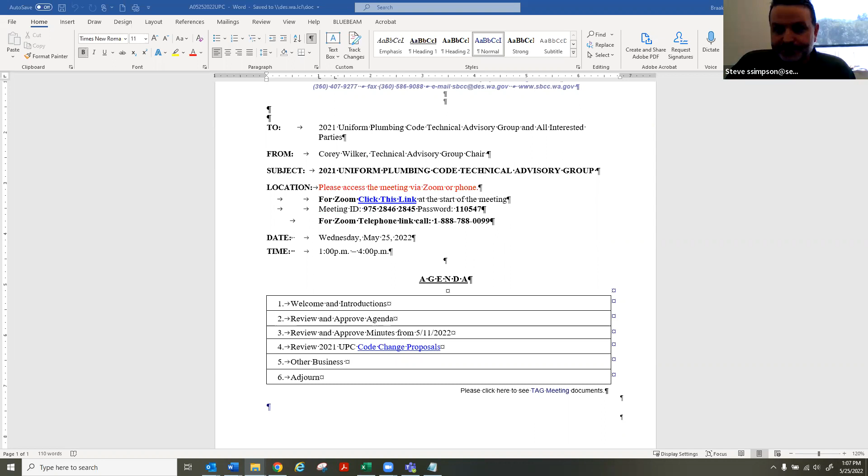Let's move on to item number 3 on the agenda, which is review and approve the minutes from 5/11. And we don't have the minutes because on 5/11, we didn't really have a meeting. We closed the meeting, yes? We didn't have quorum, and we closed the meeting, yes. So you have to help me procedurally. How do we move past this agenda item? We just pass the agenda item and get to the next one. Well, shouldn't you approve the minutes from January since that was not done at the last meeting? Krista, do you have these minutes handy? Should be popping up. Okay, thank you.

Mr. Chair, if it suits you, I'd like to make a motion to approve the January meeting minutes that are on our screen currently. Thank you. Krista, can you move that down? Is it January 5th? January 5th. We have a motion. Can I have a second, please? Second. Thank you. We have a motion and second to approve the minutes from January 5th. All those in favor say aye. Aye. Any opposed? And we will correct Jed's name. Oh, yes, Sherman is not spelled correctly. I accept that as a friendly amendment.

Okay, so we will move on to agenda item 4, which is review the 2021 UPC code change proposals. I have the list in front of me that I printed out, and just in discussion, does anybody have an issue if we just follow straight down this list, starting with section 608.5 and working down? Is that all good with everybody? So starting with the proponent, the City of Bellevue. 608.5 discharge piping. I'd like to open that up for discussion.

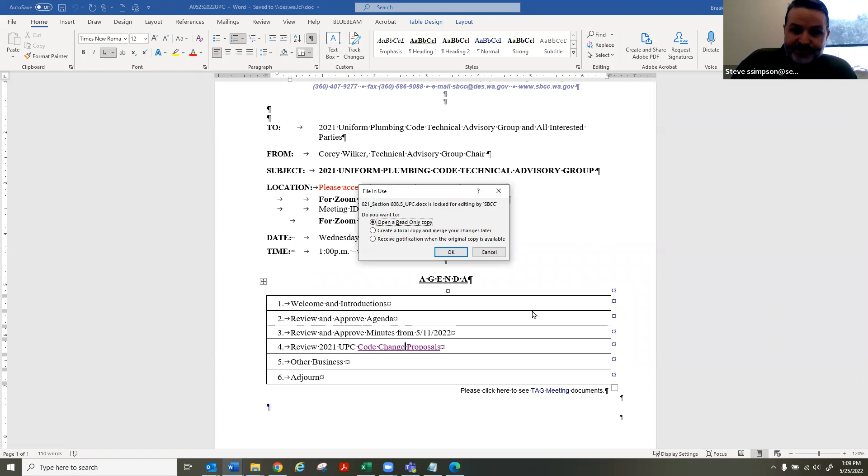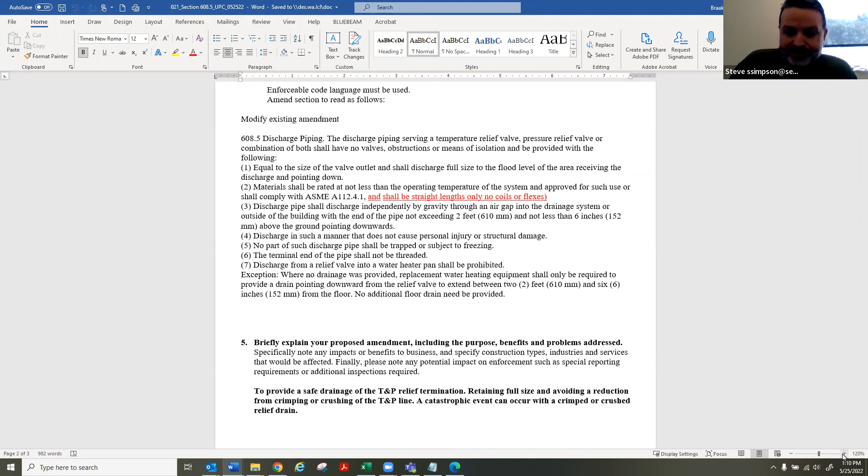Mr. Chair, I can speak to this one a little bit. I was on the council when this particular code got revised, and we didn't catch a piece of it at that time, and it's been unamended since. I think Chris is getting ready to pull the information up. The issue is that the code used to require rigid piping for the discharge piping of a temperature pressure relief valve of a hot water system. And somehow when they went to the new material section in ASME, it got rid of that component.

And so the concern, and it's an extremely valid concern of the plumbing officials over in Bellevue, is that you would potentially have a kink situation with a flex hose, plus you have a reduction of flow with flexes. So there's no way to write up a correction for someone just hooking up basically a flex hose as opposed to straight piping, which is what it used to be.

So I would speak to support this code change for the life, health, and safety benefits that it would give. Thank you, Chair. Thank you. Are there any other comments on this particular issue? Yeah, proposal? Steve Hart. Rather than saying with no, I think it might be more appropriate to say without coils or flexes. And shall be straight lengths only without coils or flexes. Change the word no to without.

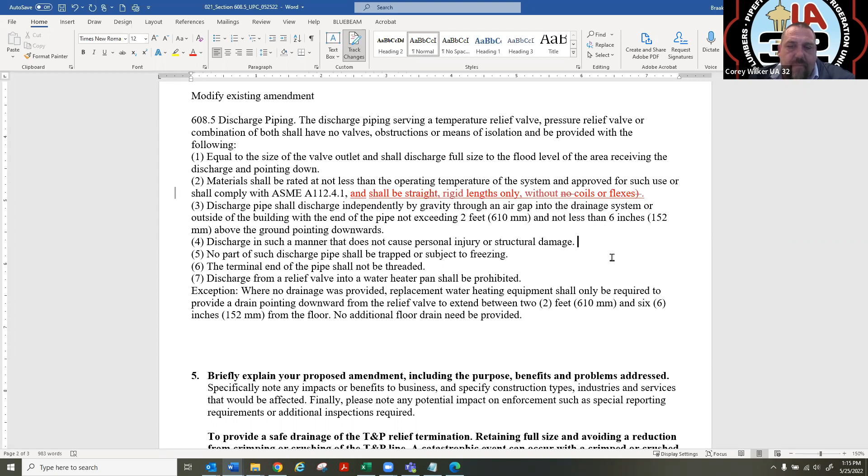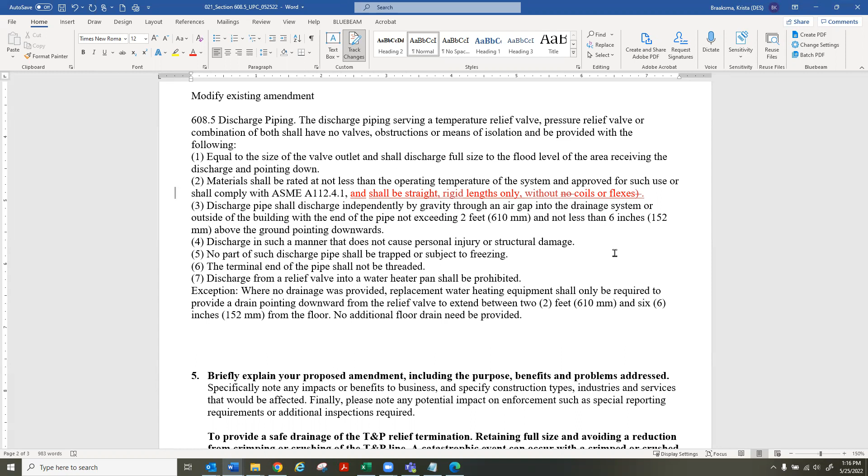So we all understand that it applies to pipe, but I'm just trying to read the whole thing at once and see if there's a better way to verbalize it. Do we need to add the word piping? No, I don't think so. It's pretty straightforward, because the section is discharge piping. Okay, Mr. Chair, I'd like to move that we approve this. We have a motion for approval. Do I have a second? Second. Should we do a roll call on these proposals, or is it okay to do aye and nay? It's okay to do aye and nay. All right, we have a motion and a second to approve the first proposal for section 608.5. All those in favor say aye. Aye. Any opposed? We'll move this proposal forward as adjusted.

The next proposal on the list is Appendix M UPC for the peak water demand calculator. I'll open it up to the floor for discussion. I actually have a question in general about all the appendices, because there's a lot of them that are not adopted. I'm just curious of the history of why they're not just adopted up front. Ken Burlett's got his hand up. Go ahead, Ken. Yeah, my comment is, part of submitting your code change proposal is to include the text. It's right there on the document itself. And it wasn't included in any of his code change proposals. It just says we want to adopt these appendix sections, but the words just aren't there. So I'm hoping that you guys will maybe reject these since they weren't submitted properly.

It's a good point. So we overlooked that. I assume the proposal is to adopt the model code appendix M, N, and F. Is that correct? Yeah, I think for these next three proposals, are they all missing the appropriate language? Well, they'd have to include the whole appendix in there, what you just referenced. So I just want to adopt this appendix. And you'd have to just basically recopy the appendix in there where it asks for the amended section to read as follows.

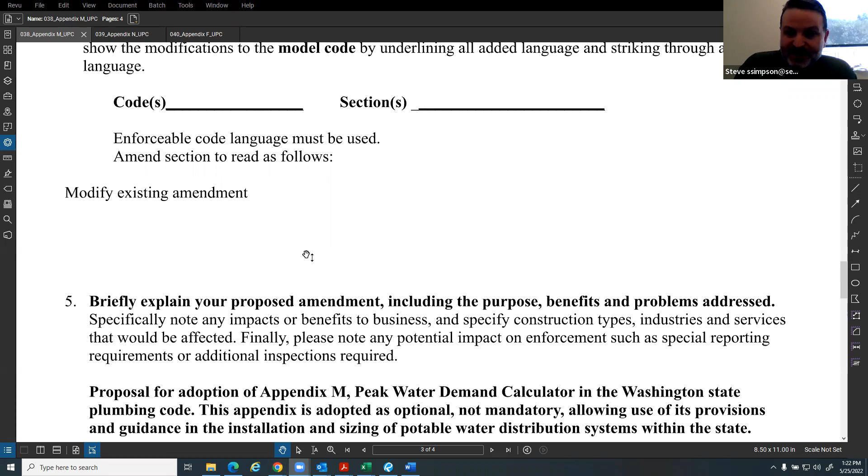If you wanted it mandatory, you would get rid of the optional piece and just say if you're in residential construction for multifamily or single family, you have to use Appendix M. That would be the mandatory language, I think. And I could be wrong. In looking at Appendix M, the applicability says it provides a method for estimating demand. It's more like, okay, here's another option to determine the peak water demand. It's not necessarily, this is the way you have to do it. It's kind of the way I read it.

Right. And Eric, I think what it does is it gives you an engineering method to get to smaller pipe size, increase the velocity, and those kinds of things. So it does a few things, probably an energy beneficial component, saving hot water. Instead of running 1/2 inch, you'd run 3/8 potentially in some applications. Right, this is similar to what we do with adoption of Appendix A. Yeah.

And this is Steve Hart. I believe that the language is ambiguous because people already have the option, if they choose to adopt their own code like Seattle has, they can impact it by adopting whatever appendices they wish to pull into their own code, which is specific to their jurisdiction.

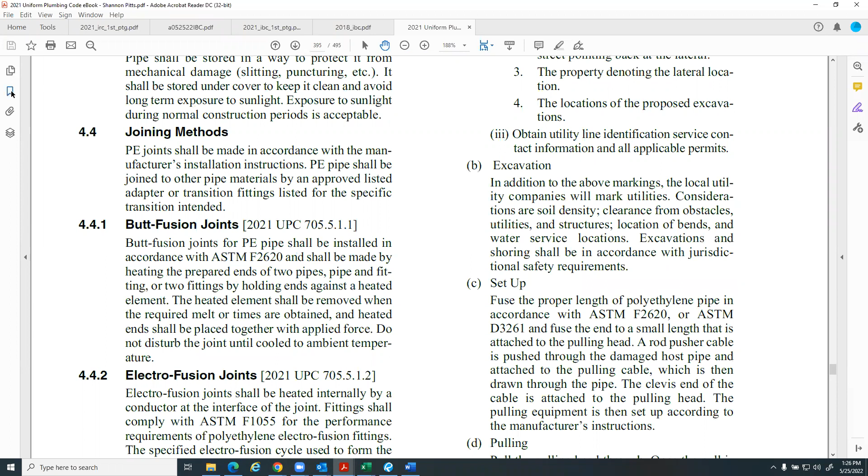That might not be so connected because Appendix C allows the same probability of use, and the parameters of system sizing are very closely connected. That being said, using a demand calculator versus Appendix C, and I don't believe unless somebody has a homegrown spreadsheet where they can input data and spit out system sizing, etc., it's pretty much very closely related.

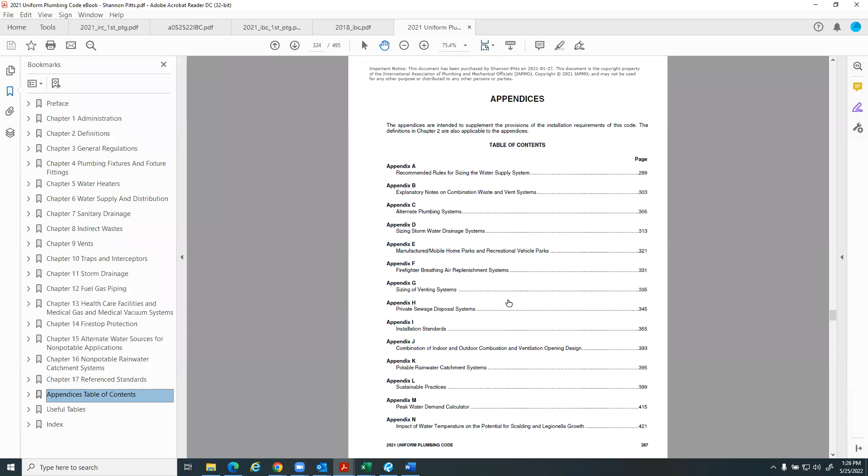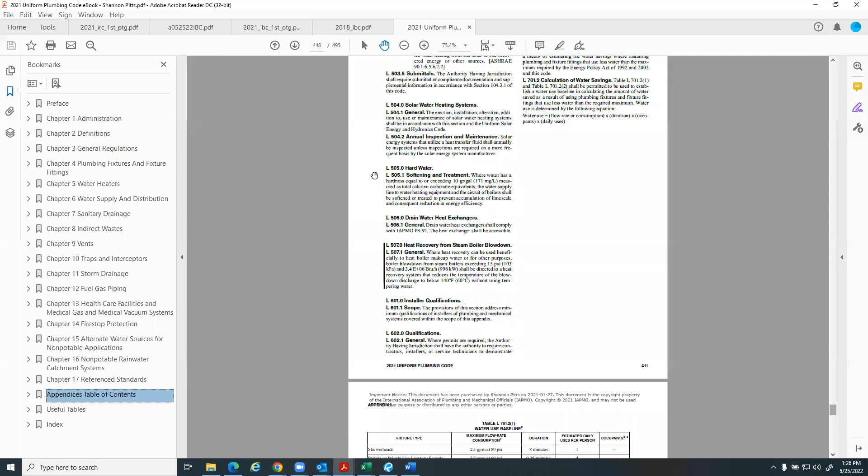The only difference between the two is Appendix C can be used appropriately as wanted for the occupancy, as Appendix M is very specific what it can be used for. So you're only talking about certain occupancies or structures, meaning multifamily, hotel, motel. And so when you use Appendix C, you have those same probabilities of use.

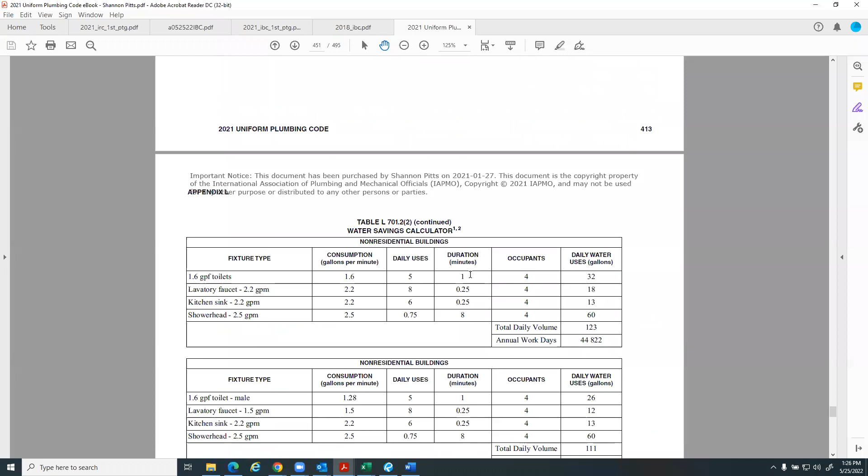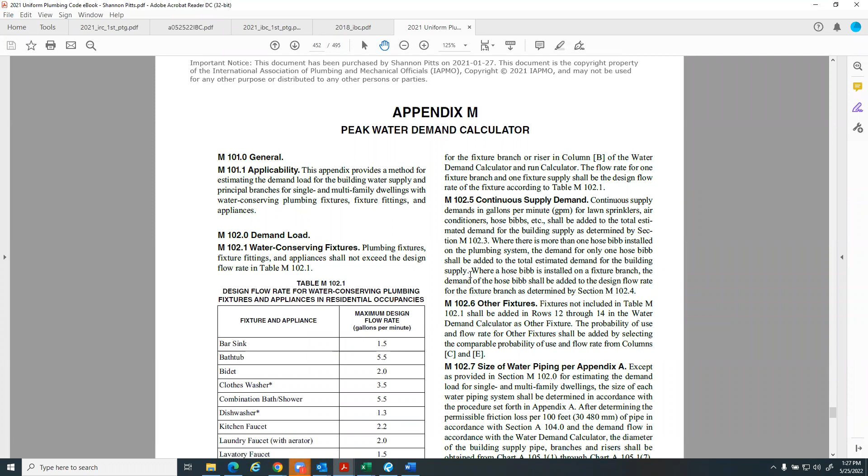And I'm not really sure where the savings is occurring because the sizing is very similar. The only difference is where and when it can be used. So C would apply to all buildings, but M applies specifically to single family and multifamily. In this language, yes, meaning these are multifamily and they do say for single and multifamily dwellings.

But if you run this calculator, you don't really make a savings. And so I'm not really sure why they even incorporate single family, because it really doesn't come into play. It's usually used, as I stated, for multifamily dwellings that are multi-story structures, hundreds of units, not a singular single family home.

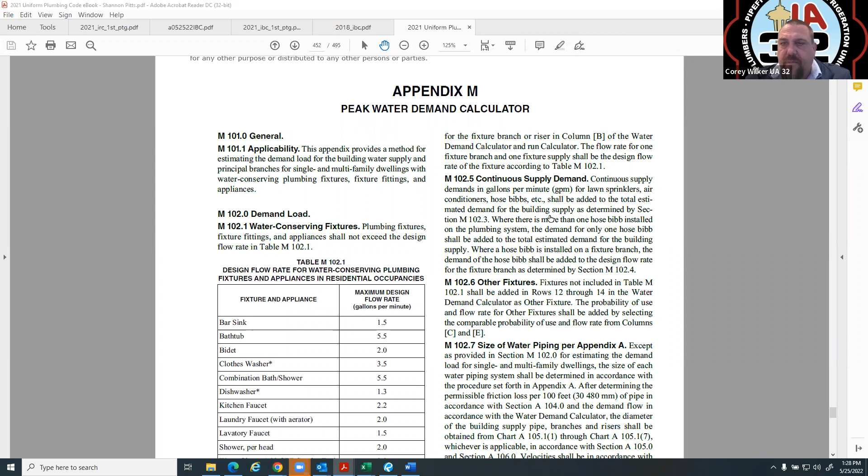So Steve, can you help clarify then? You said you were opposed to moving this forward; what specifically is the deterrent for you? Well, the issue that I have with it is that Appendix M is a system sizing calculator that the layman can use, but because they use it, they may not be able to discern where correction or error is occurring because it's on a higher level.

Whereas Appendix C gives you the same demand, and in our jurisdiction in the city of Seattle, we require that it be used and incorporated for design by a design professional, somebody in the discipline of understanding really what the accommodations of Appendix M derive as far as system sizing goes. And it's from an engineering perspective and not prescriptive.

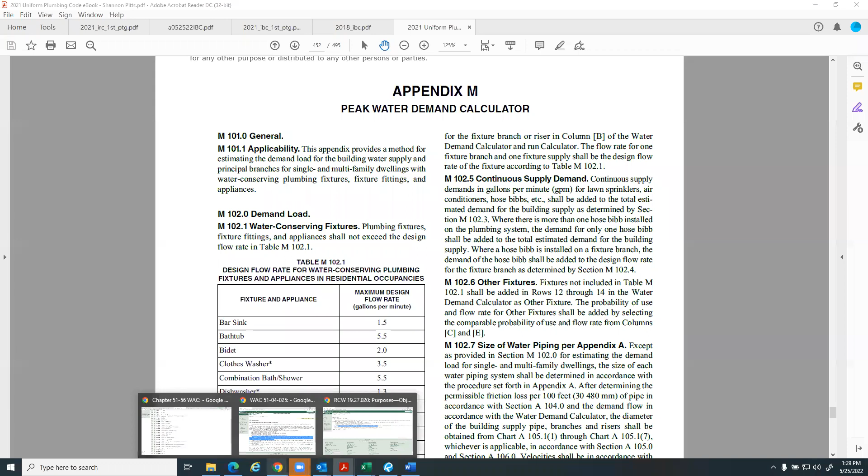It may spit out numbers that are in layman dialogue for velocities and size and even GPMs and fixture units and so on for runouts and branch mains. But if there is an error in any of the documentation, the person that is using that demand calculator, not being a design professional, would not know the error of that design. They may, but I doubt it.

And this is the conversation that I have had with other individuals regarding this. Appendix M is really a type of system that, like in our jurisdiction, the city of Seattle, requires somebody who has a higher level of understanding and knowledge of the components and how you arrived at the loading and the sizing of these systems.

And you can do the same thing with Appendix C using individual numbers, but in a more calculated way that's more robust, that really requires the knowledge and the experience and the discipline of engineering. Whereas you're given a calculated sheet in Appendix M and all that information is spit out towards you based on what you're applying into it.

And for that, I don't think that the community is ready yet until enough Appendix M systems have been installed so that those who can see them will understand how they're being used. In fact, I believe maybe 4 years ago, Appendix M being applied in a project in Seattle was the first in the nation. So you can see how in the infancy of this design calculator, how far away we are from really getting true measurable empirical data when these systems are installed. I think the industry could probably handle it, but the average designer is just not ready for it yet.

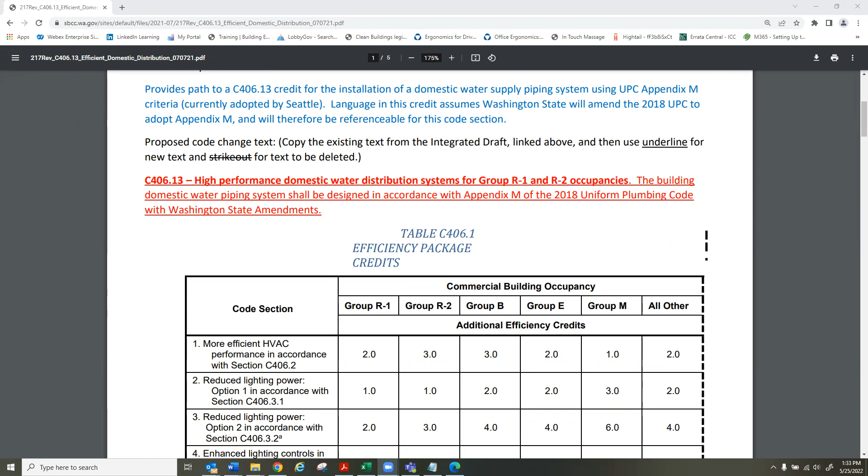Yeah, the loading. When you look at certain levels of sizing based on parameters of minimum and maximum loading, either by GPM or velocity of the material being proposed, what you discover is that the amount of allowance you can use on a single piece of pipe based on pressure and velocity or gallons per minute at the fixture has a margin within there. Maybe in a very large home you might attach a couple extra fixtures on a loaded piece of pipe, whether it be a run-out from a branch main, or the branch main itself may increase slightly, maybe one pipe size or not at all, which is very closely related to a prescriptive environment, because the parameters for how much you can load into a piece of pipe are present.

Meaning you might get 7 water supply fixture units on a 1/2-inch pipe based on a prescriptive approach. But although you may input data into Appendix M that is similar, you may still end up with a 1/2-inch pipe. It may not change the size of the pipe system at all. It does change it when you get into larger uses and more uses and combined uses like in a multi-story, multi-family structure.

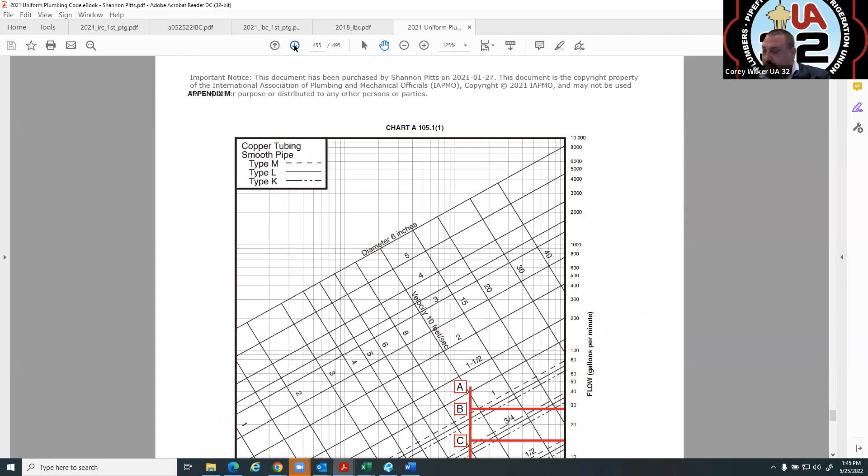Let's move on to the next proposal, which was UPC Appendix N. Impact of water temperature on the potential for scalding and Legionella growth. I'd like to open it up for discussion with the group. Does anybody have any information on this proposal? Go ahead, John. Yeah, sorry, I just had a kind of question. It's sort of related to what you guys just did on Appendix M as well. It seems to me that if it's not mandatory, there's no need to adopt it. If it's optional, it's optional. People can use it or not.

Yes, John, thank you. That was on my mouth. I just didn't say it, but if it's allowed by a local jurisdiction for adoption, and if the intent of the proponent was to make the council adopt this as optional, well, optional for who? For the local jurisdiction or for the designer, for example? So these are different things. What I see in the rationale for adoption, it doesn't say, oh, yes, as optional, not mandatory. So if it's optional... That's what AMMs are for, right? Alternate means and methods. Yes, but optional for who? Again, there is a difference if it's optional for the jurisdiction to adopt or optional for a designer to use.

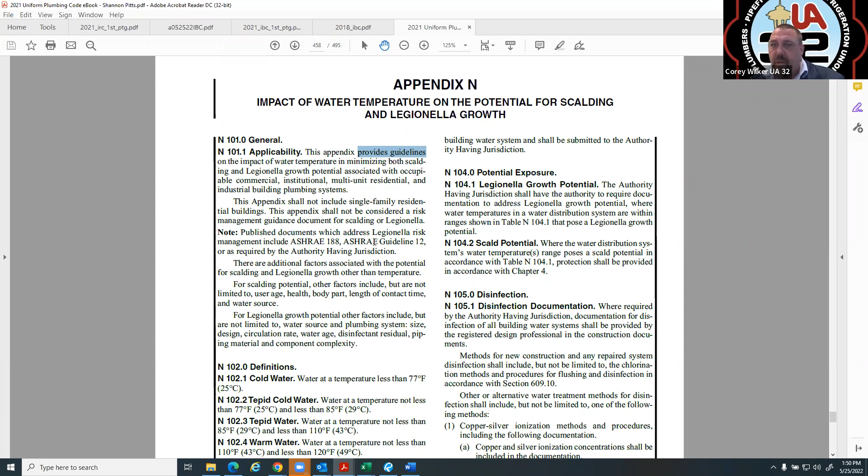And I don't know that, I just know it's important that we consider it. And part of it is if you can make pipe sizes smaller, you can increase the velocity, which will help clear the biofilm. And these other things in Appendix N are just helpful to kill it and keep it out of the water system before it goes airborne. And anyway, I just really wish the proponent was here to help us with the information.

Mr. Wilker, this is Ray Shipman. I just want to let you know that I was able to call in from a phone. Okay, Ray, thank you. Yep, thank you.

Hi all, this is Steve Hart. I just got off the phone with Ed Holmes, who informed me that the concept behind the verbiage in his statements for N, M, and F are specific to the adoption of a jurisdiction. So that takes away the ambiguity of how we're reading how it's being proposed. The context of the proposal is that a jurisdiction, like in your example of the city of Lacey, has the option to adopt, but it's not mandatory. Which they have anyway. Okay. That going back to John's statement.

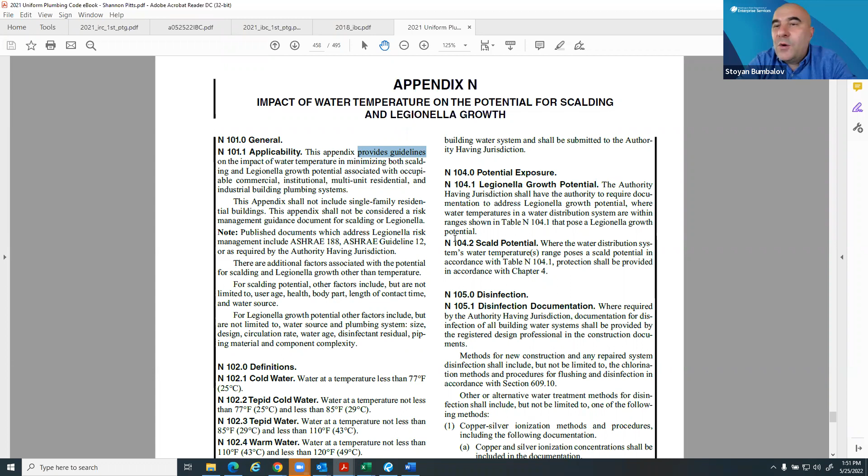But Stoyan, you had up that section where it says we adopt the appendices A, I, and I can't remember the other one, to be quite honest with you. I should know it after 9 years on the plumbing TAG. A, B, and I. Yeah, A, B, and I. So what that would do though, if we did adopt these, it would add A, B, I, M, you know what I mean? Then you would have something right in the WAC that says that those appendices are adopted.

Well, yes, but my question for you folks is, I'll use my wild card. I'm new here, so I'm not sure how you enforce that. But A, B, and I, in my opinion, if it's adopted, then it means that it's not a choice for the jurisdiction anymore. It's already adopted.

That's true, but the applicability of A, B, and I is that I do not need your permission to incorporate A, B, and I in any design that I choose. I can incorporate that in an engineered system, or into a prescriptive approach of a system design. The concept behind what is being proposed right now of M, N, and F is to incorporate that into the option of the jurisdiction. A jurisdiction already has that option. So the way that it's being proposed in the document by Mr. Holmes is really already allowed as an option.

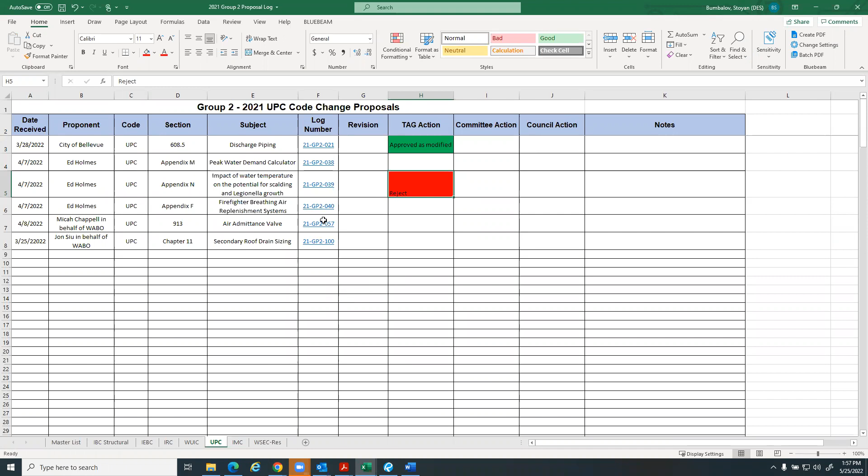Yeah, this is Steve Hart. I follow the same instructions I mentioned a moment ago, that I would not approve for the same reason that this is maybe a code cycle or two within the appendices. And there should be some sort of regulation on this, but I'm just not really sure who and where or how.

I'm really defaulting at this time to look at it more in the format of that being under the fire department, in their purview of how they view this requirement. And so at this time, again, I would not adopt this appendix at this time. Thank you, Steve. I think Mr. Ken Burlett can shed some light. Go ahead, Ken. Yeah, thanks, Corey.

So just to be upfront, City of Seattle Fire Department does not support this appendix. I was part of the fire code TAG. We did not support the appendix in the fire code for firefighter breathing air replenishment systems. And this proposal is a little bit different because it doesn't say optional in here. And if this was adopted and enforced, it has specific requirements for high-rise buildings over, I think, 200,000 square feet.

So it wouldn't just be a Seattle issue. It would definitely be a statewide issue for larger warehouse buildings. I do understand that there needs to be some regulation for these when they do get installed, but this section, if it got adopted, requires it. So it's not just a reference standard telling somebody how to do something. It actually says you must do it if you meet these certain criteria. So City of Seattle Fire Department is against this.

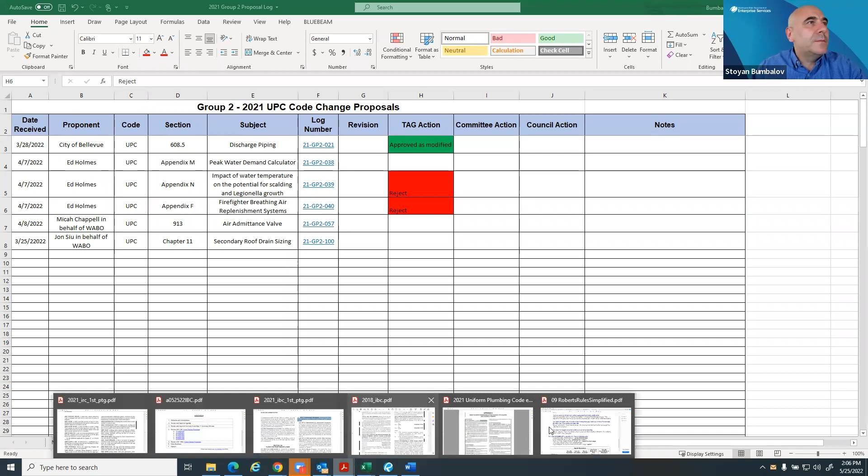I was unaware of a procedure that would allow that since we'd already voted on it. So how does that procedure come into place if we've already voted and approved? Let me show. Give me a sec. I think we're right here. So what I need is a motion to reconsider from someone who voted in favor of it. Yes. Thank you, Krista. Do I have a motion to reconsider from anybody who voted to approve Appendix M? No motion. Then we are not going to reconsider. Okay. So we are going to 057.

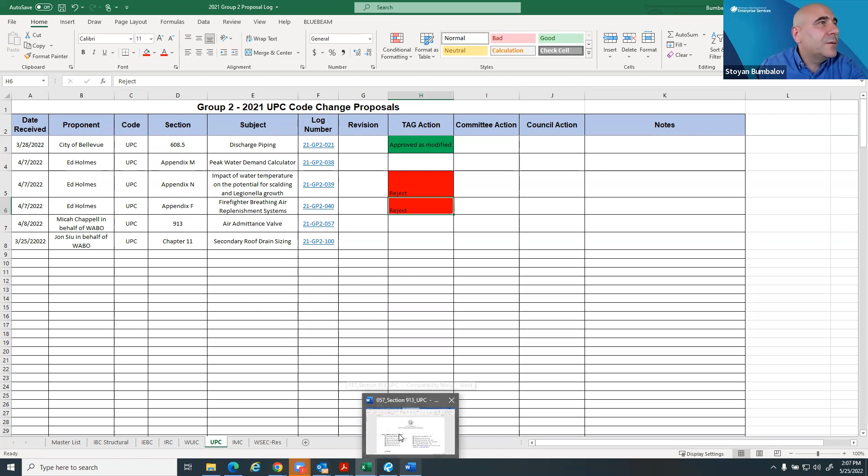Section 913, air admittance valve. Open up to the floor for discussion. Go ahead, Micah. Thanks, everyone. Micah Chappell. I am the Washington Association of Building Officials Technical Code Development Chair. We put forth this proposal because code officials get this request so often as an alternate method. Upon further discussion, we decided to put this in the Seattle code last code cycle with support of, hopefully, someone on the tag today.

It's been useful getting the feedback from the code officials. I don't think there's ever been a code official that has denied this. If there is, it's pretty rare when it does come across as an alternate method.

So the thought was, why not put it into the code for the state as just a straight allowance without having to go through that alternate method material request every single time. We did look at the IPC language and brought over some of that in similar language, but not exact. Some of it's exact, some of it's similar. But we did what we thought was a better reorganization of that information and then added a few things to it. We specifically wanted to talk about where these are permitted, the installation, and of course the location, which gets to be very specific and covers, you know, a lot of areas really that it's

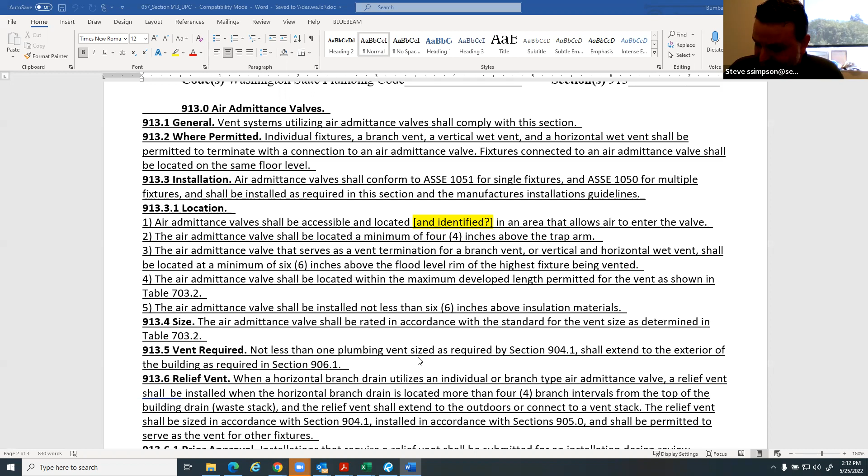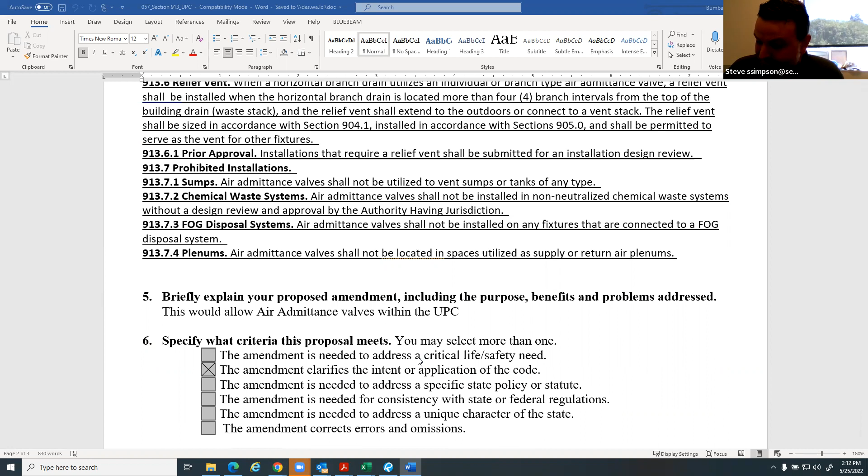Yeah, Mr. Chair. So I got a procedural question again. I guess that's probably because I was on the council for 9 years. So under WAC 51-04-025, I don't see anywhere in the amendment where the amendment is needed to address a critical life safety need, the amendment clarifies the intent or application of the code, the amendment is necessary for consistency with state or federal laws or regulations, the amendment corrects errors or omissions, or the amendment eliminates obsolete, conflicting, or duplicating unnecessary regulation.

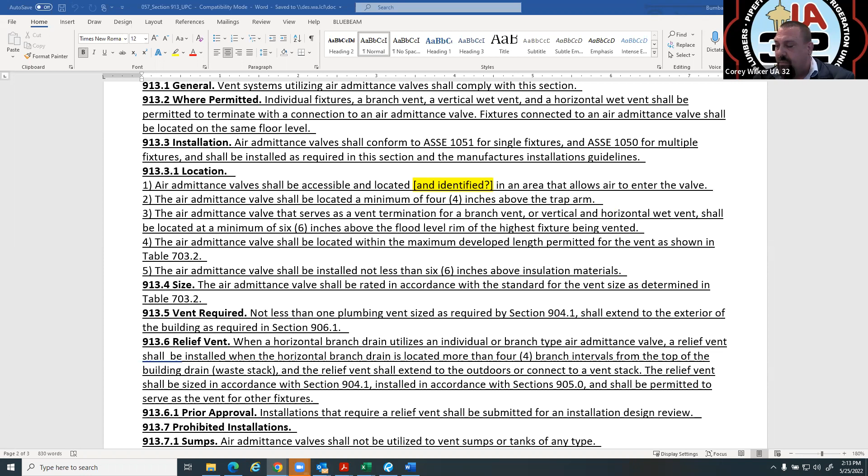And I don't see how this thing got to us if you use those parameters for how we get to the amendment. Once again, that's A through E for WAC 51-04, statewide and emergency statewide amendments to any of the codes. So I'm just kind of curious how we got there. So your point being that there's no criteria that is met to change the code? Yeah, once again, he has it checked off that it clarifies the intent or application of the code, but that would mean it was already in the code, and it's not. He's trying to add content, not clarify, in my opinion.

Stoyan or Krista, can you help with that? Well, again, personal opinion, if you're adding something, it's not necessarily that you're not clarifying the code. I haven't evaluated this proposal in detail, but you can submit a proposal to clarify something that's already in the code. It doesn't necessarily mean that you have to modify the language. You can add to it to clarify it. Again, this is how I read it. You may disagree with me.

Okay, so let's continue. Steve, do you have something to rebut or add? No, I'll wait for further discussion. I just needed to find out that piece of it. I'll wait for Micah to hopefully pick up from where he left off. Yeah, let's go ahead and jump to Micah again and let him finish, and then I'll come back for Larry and Bill Masaki. Go ahead.

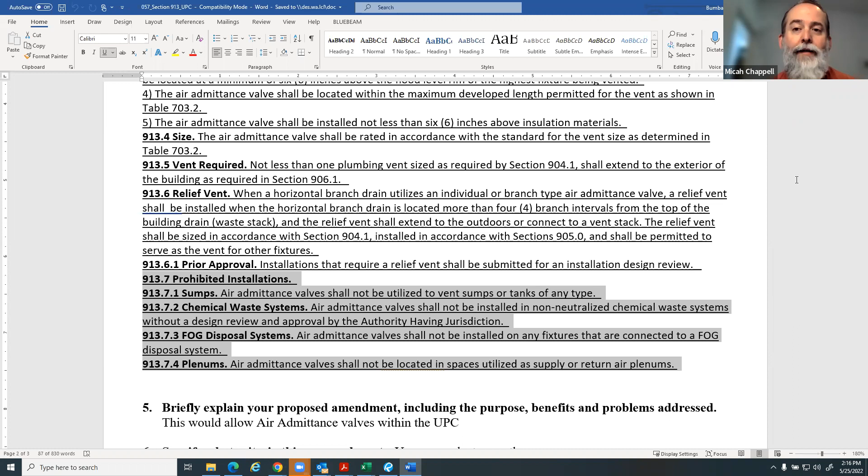And if you're doing that over and over and over, at some point you got to go, hey, this has been a standard item that is used. We should have this in the code or it should be allowed in the state code. That happens quite a bit. I mean, if we say we can't add code because it doesn't clarify or some other reason, then it really puts a limit on how we can change the code, especially based on items that are being installed on a regular basis. So I missed some of the other conversation, but I'll cede the floor to everybody else and more discussion.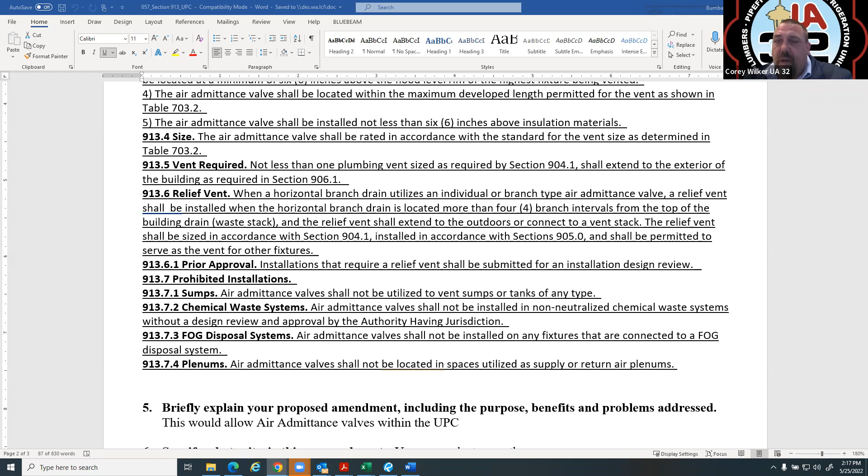Thanks. Thank you, Micah. And we'll go back to Steve. If you had something to finish, you still have your hand up. I'll take my hand down for a minute. I just forgot. Okay. Larry, are you still wanting to say something? Yeah. Go ahead.

Thanks. Thank you, Larry. Bill, you still have discussion? Yes, I do. To the proponent, Micah, on the criteria you selected, it clarifies the intent or application of the code. The unamended version is a venting system that uses no moving parts whatsoever. And your proposal here is to add a mechanical device to a venting system. So how can you explain to me how that clarifies intent or application? Because from my read, you're going in a completely different direction.

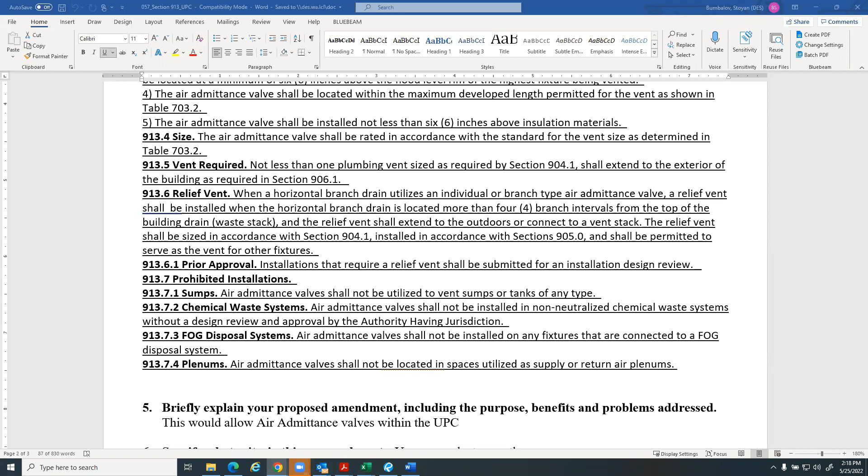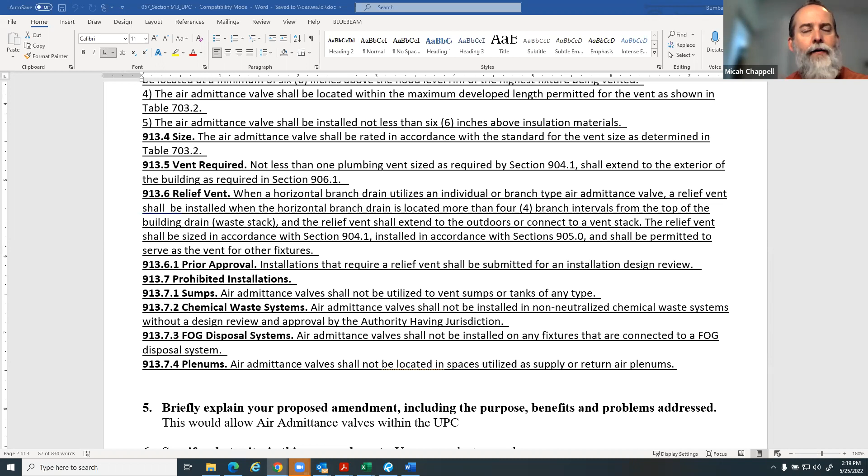Okay, I'm not sure I understand your question. You're asking how this clarifies the intent of a mechanical device being allowed. This would clarify the intent of the code to provide guidance on construction and installation. Maybe somebody else could provide input on that. The indication is that no one on this call has ever requested this as an alternate method, and that the only things that should be allowed are those passed through the code rulemaking process through another entity. That would indicate there's no way we can change something to provide guidance on when these are allowed as an alternate method.

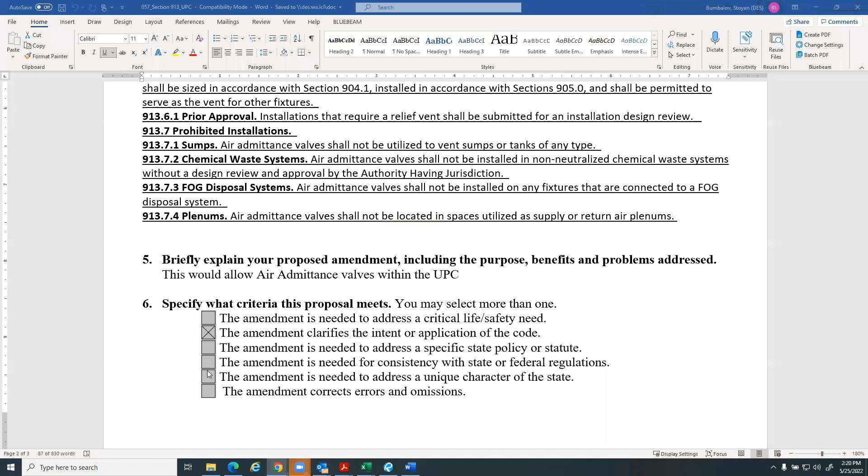I guess I'm missing something. No, I see it as a proposal for an alternate method, but not clarifying what's already in the code. The code doesn't use a mechanical system for venting. This does, so it's completely different than what's prescribed right now. And I'm curious how that meets intent or application.

Okay, so what I'm hearing is folks are not having an issue with the code change. They're having an issue with the criteria on where it meets the standard for a code change at the state. So with that question, I don't have a clear answer, because we'll have a difference of interpretation on what providing clarity of intent or application of the code means. And maybe I'll use that argument for other proposals down the road, because it's one that is open for debate for sure. And I don't have an answer to probably convince you otherwise.

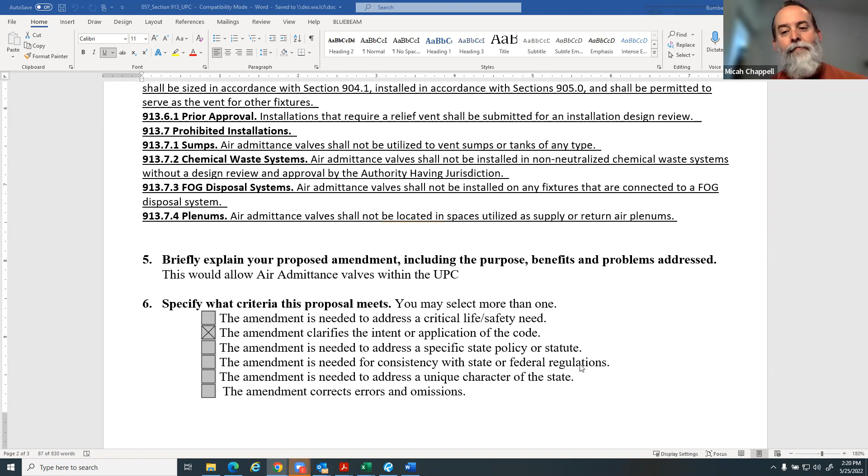Bill, do you have any further rebuttal? No, thank you. Thanks, Bill.

Ray Shipman, go ahead. Yeah, I was just gonna, I mean, with all due respect, I would prefer giving this as a means and methods approval, and not just put it into the standard body of the code. I think there's other ways of doing it. I've never been a fan of these. I'm gonna kind of go off of what Larry said as well. I think it's a failing system, but that's just my 2 cents. I would prefer that this be approved on a case-by-case basis, other than just thrown in the code as a standard procedure. Thank you, Ray.

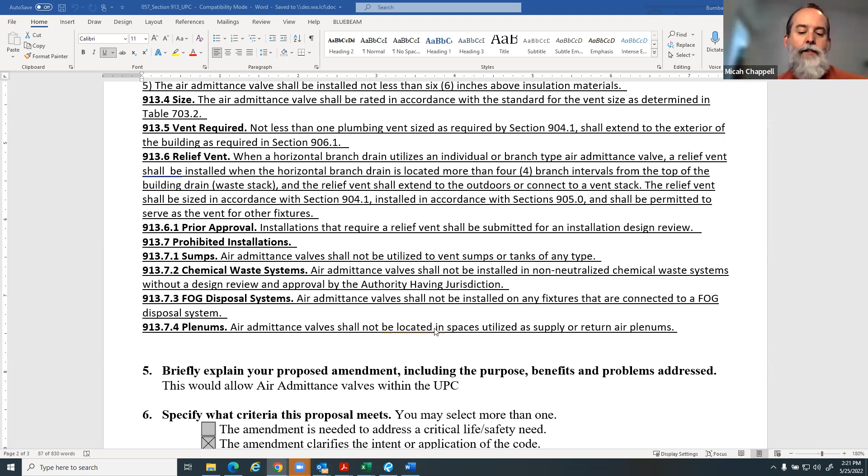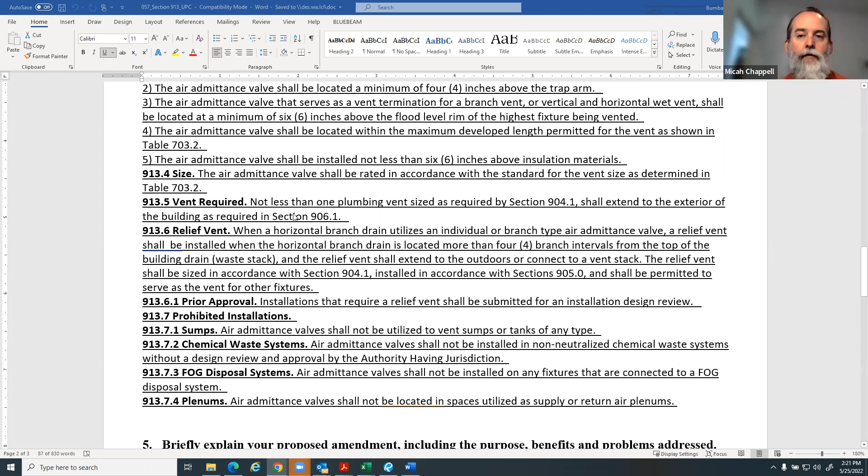Some hands went up. I think Bill just didn't pull his hand down. Micah? So I guess a question to Ray or other code officials that are on here, would you require that, say you got a design for a new series of homes, say 150 homes, would you require that request for all 150 homes? And how would you process that? That's kind of my question.

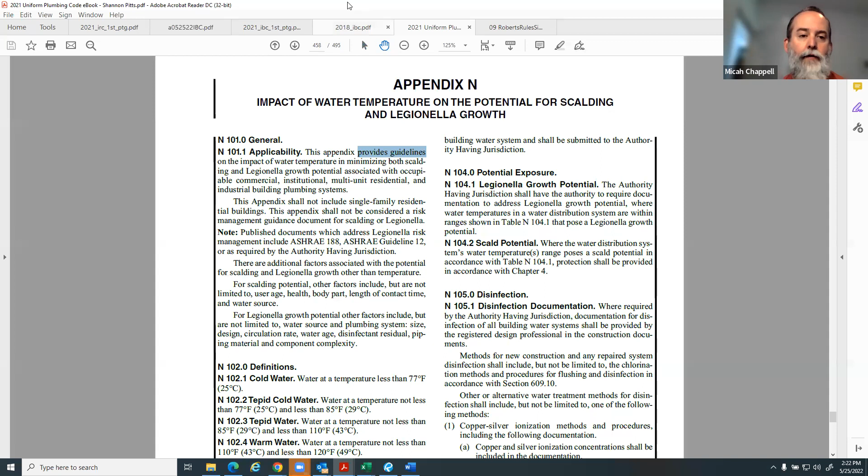It sounds like what this body's asking of the code official is to provide an alternate means and method process for every single one of these that goes into every single structure. And if you're approving these at a significant rate as an alternate means and method, then that's something that should be considered to be moved into the main body of the code. But that would be my question to Ray, is how you would process, say 150 or 200 of these. You would just duplicate that for every one. That just seems like one of those additional mandates on the code official for something that is fairly simple and successfully used all the time as an alternate method.

I would respectfully, I wouldn't say used all the time. I would ask why they wanted to use it, and what is the reasoning between having to use this and not the standard method currently. I hope I'm understanding your question right, Micah. I think we've talked about it in other UPC meetings, that there's always a way to vent something. It just may not be the most convenient way. But I like the way it's written. I like the accessibility part of it, and it has to be labeled. I like those options, but I think it's easily something that could go bad and not ever get fixed.

Thank you both. Let's move up to Steve Hart. Yeah, hi, this is Steve Hart. So this code section 913 is at this time an allowance in the Seattle Plumbing Code. And there are many identifying needs, in the context that Ray Shipman just stated, that there's always a method to vent, but sometimes there are very expensive ways to vent, and air admittance valves are a suggested way to mitigate that cost or that impact, meaning that some floors are highly secretive in what they do, or they have penetrations that can't enter them due to what they do within those units or on those floors. And things may happen above or below that would prevent penetration.

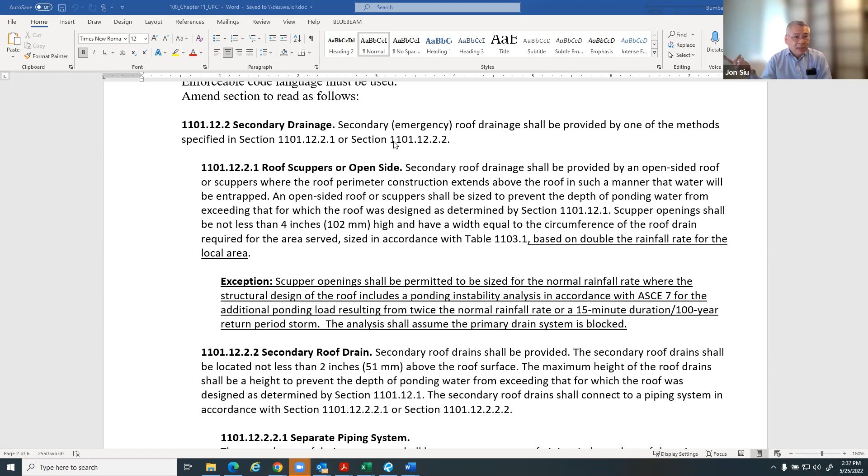Can I respond real quickly to that one? My concern, Steve, if we were to try to do that, I don't know where that correlation would happen. To me, this needs to get handled by the folks who put the plumbing in, right? Put the pipes in. They need to know how to size their piping, and that's why I proposed it for the UPC.

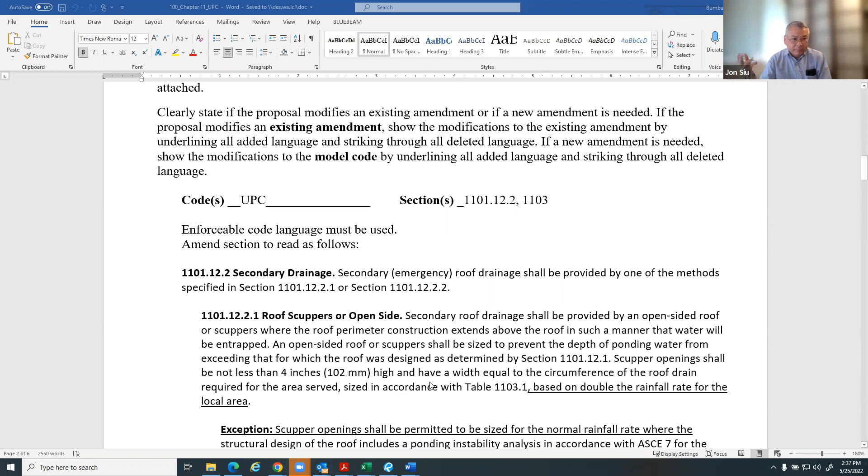Jon, is there any need to have any pointers pointing you to the structural code of why this needs to happen? Because when there's a change, refer to IBC, you know what I mean? To me, that's part of the training issue. That to me is commentary. Okay. And I think I've heard Stoyan say in other forums, maybe I shouldn't speak for him, that they're hoping to be able to document some of the whys of these changes. So to me, the why isn't a code issue. You don't write it into the code. Okay, thank you.

During this rulemaking cycle, we are trying to include a little bit more detailed rationale. So, for each change, there will be a little bit more explanation why the change was proposed and adopted, and not only what was proposed and adopted. And also we will start with the building code, developing a document that will have the rationale part of the document, but that's if we can have a complete team. Currently we're two down, so.

And I will say, Steve, that the reason statement does include the why. I hope anyway it was clear. It does, yes. So we are using a table, and one column says what are we doing, and the other column says why. So I think following the rulemaking documents, there will be a good explanation on that. Okay, thank you. Let's go up to Bill Masaki.

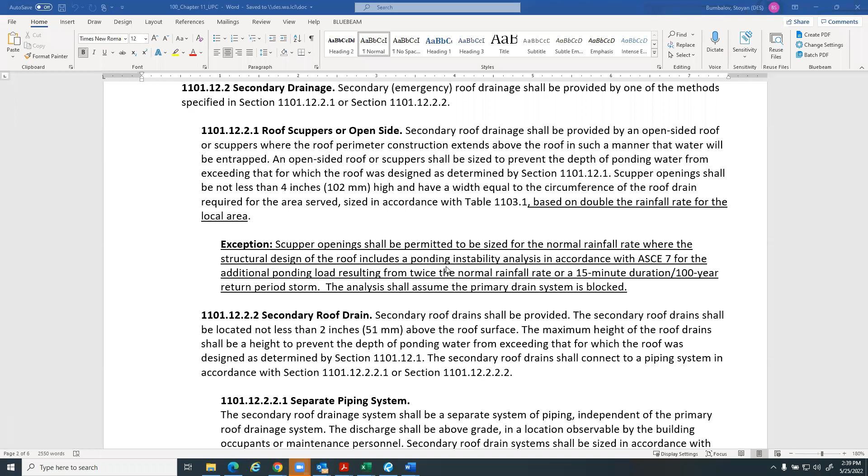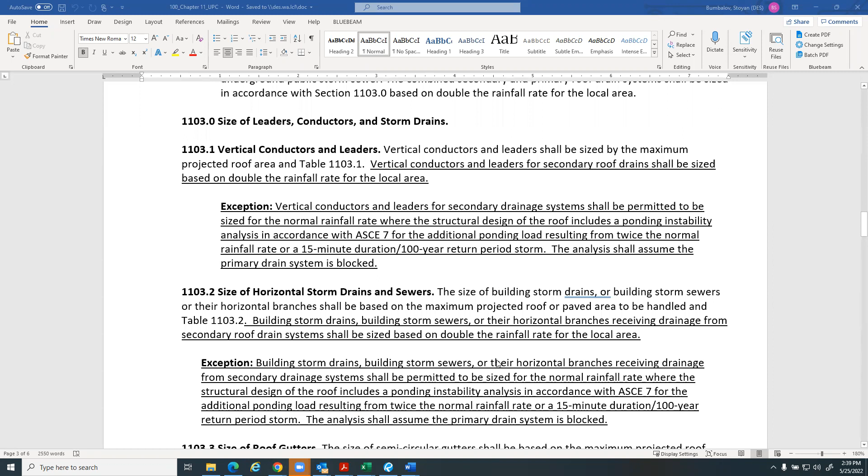Yeah, thank you, Corey. To the proponent, Jon, this appears to go beyond just the overflow systems. I'm reading down in your proposal, we get to section 1103, and that addresses vertical and horizontal storm drain piping. So everything would be sized based on double the rainfall rate. Is that correct? No, I did try to tie it directly to the secondary roof drains.

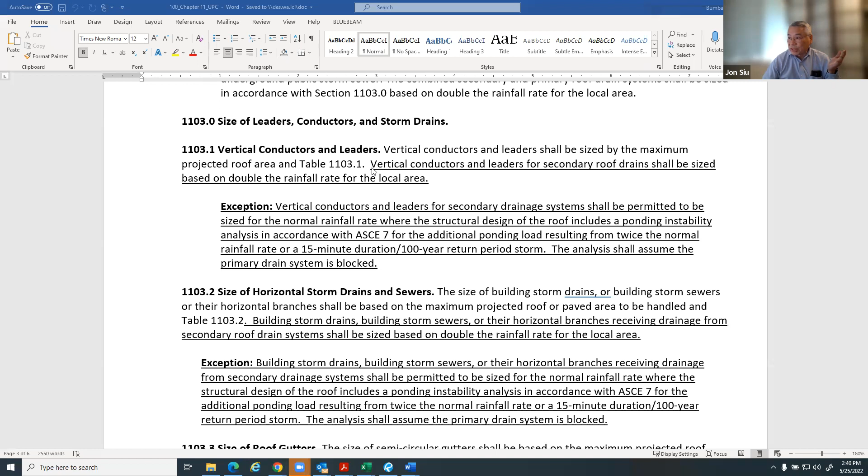If you look at 1103.1, the sentence that's underlined there, it is just secondary roof drains, vertical conductors and leaders for the secondaries. Now, if you get down to the horizontal storm drains and sewers, similarly, if they're receiving drainage from the secondary roof drains, then you have to size them up also. Got it. Thank you, Jon. Okay, next up would be Steve Hart. Go ahead.

Yeah, this is Steve Hart. So I understand the concept here, and I'm going to make the assumption this is through climate change and rainfall rates that either are maybe not as accurate as they once were, and we have better ways of recording data, where we've been able to identify in specific areas a larger grouping of rain in a shorter period of time, resulting in ponding and potential roof collapse or failure. So therefore, the design must be in accordance with the outside environment, meaning the precipitation that's falling to these roofs.

But one of the effects of this proposal would be a substantial increase in pipe sizing, should the proposal be to make a combination system of a primary and a secondary. And the secondary drainage, everybody calls it the emergency or overflow. So currently, most rainfall systems from a roof are designed as what's called a combination, where they tie the secondary into a vertical portion of the primary in a Y configuration.

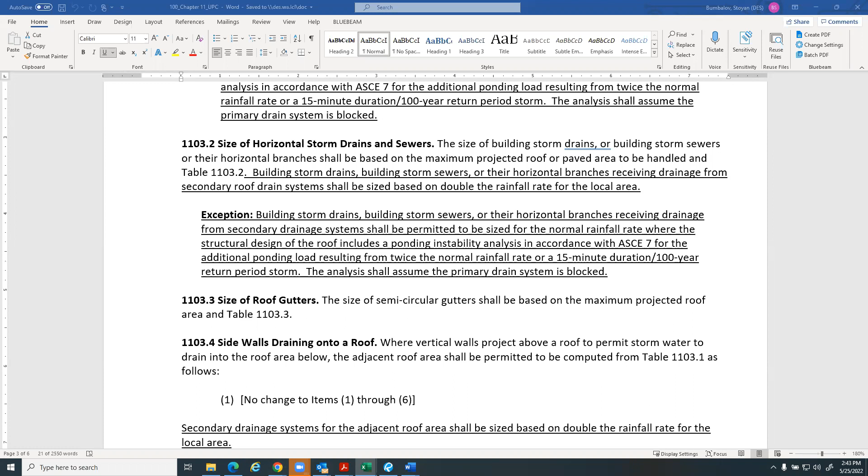But having double the rainfall rate on the overflow has the same effect. Now you're asking for the system to be sized with the secondary at 2 and the primary at 1 rainfall rate, a total of 3 inches per hour. And if it were tied together, you would be discharging at a 3-inch rainfall rate. That would increase the pipe size of the system, or you would have to separate the system or make language that said that's not what's occurring.

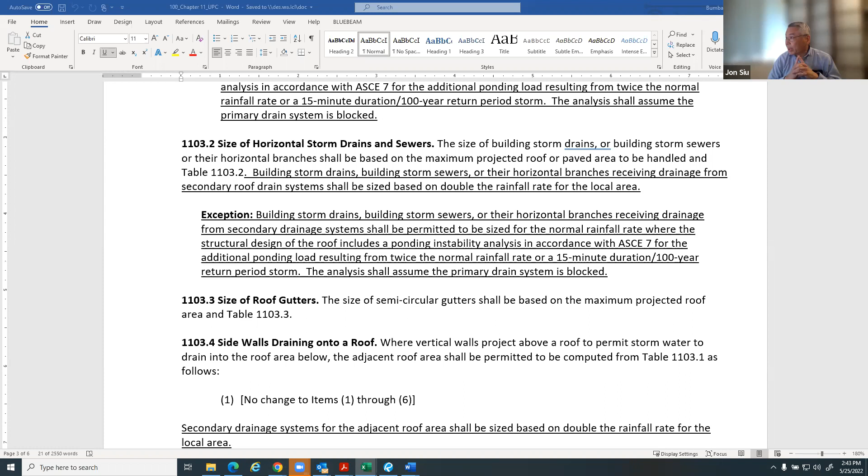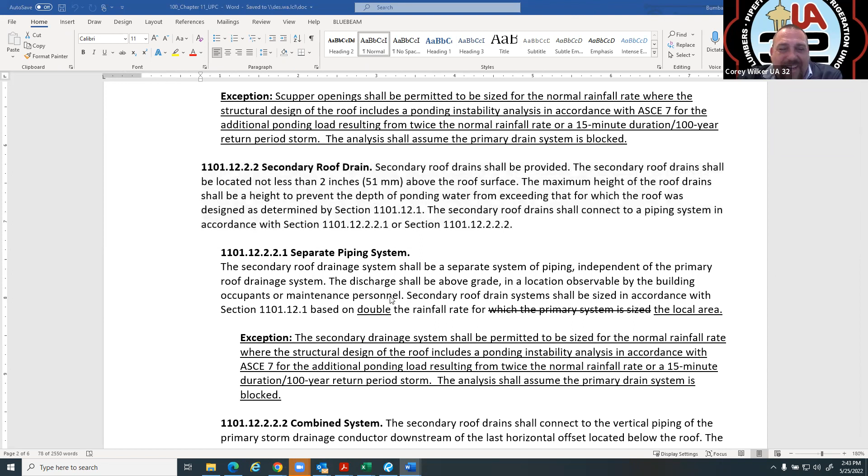Okay, Steve, let me respond to that. I guess it's Stoyan, if you could scroll up to 1101.12.2.2.2. That's combined systems down at the bottom of the page. Yeah, combined storm system, the combined system at the bottom of the page. Okay. Here you go. Thank you.

I did check with a couple other plumbing folks. Again, not being a plumber, I checked with a couple folks who have been doing plumbing for a long time on this. We are not changing the combined system. Because they felt that since a combined system is already designed for double the size, it was not necessary to upsize it any more than that. So right now, if you look at the bottom, the last sentence there, that's existing language.

And so we haven't changed that. You're still basing it on double the rainfall rate, which is essentially what your secondaries would now be designed for. And yes, you might have to upsize pipes in some cases. You might have to add more drains too. That's the other thing, you might have to add more secondaries, but the idea is that it's not necessarily, well, okay, let me put it this way.

The proposal went through at ASCE 7 based on failures that people have been seeing, and yes, much better rainfall data. They have more stations and things that they can get data from, and they've made this determination that they think that we've been under-designing roofs. And they decided to go to, let's get the water off the roof rather than having to design for ponding.

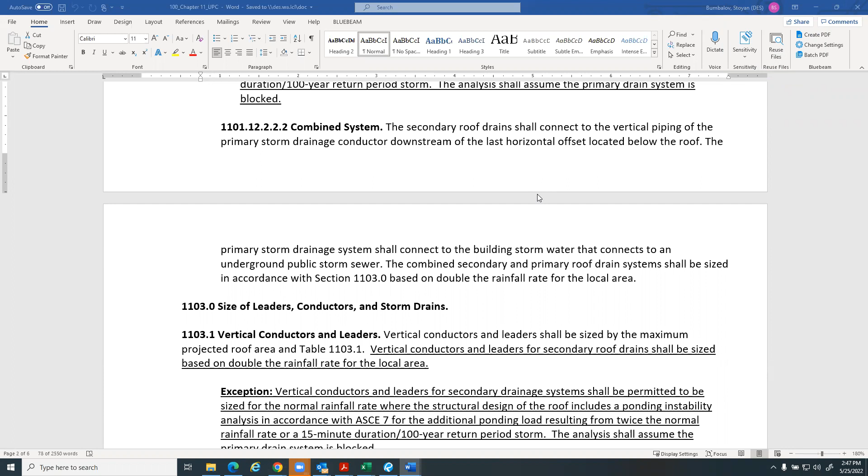But when you scrolled up a little bit to the higher point, it looked like to me it was talking about keeping the secondary at the normal rainfall. And I think the secondary should be double the rainfall myself, because the primaries already failed. And now I got a ton of water sitting on top of this sucker. And now I need to make sure that hardly anything gets up there. That's what I'm thinking.

Well, the way it's written, I think, if people have read it differently, let me know, it is for the secondaries using double the rainfall rate. The exception is essentially if you want to design your roof for this extra loading, including accounting for the sag in the roof as you get more weight on it. It sags more, so it's going to hold more water. If you want to go through that whole process, you have to still use the higher level storm. It's not the same storm that you're designing the current system to. So you get more rainfall. You have to design for that, and then you have to engineer your roof for whatever drainage you've got.

Yeah, the thing I saw is there was like 3 feet of water on top of that roof. I don't think that roof can take that kind of weight. No, obviously it didn't. Right. So I wouldn't want to make it any less; if anything, that secondary system needs to be better than the primary, because you've got an emergency now. Yeah. And it is right now.

who is part of this industry here. I don't see but a very low single-digit number of independently primary discharge and independently secondary discharge. They are typically, in my opinion, in the 90% range or greater as a combined system. And in which case, then this doesn't have that much impact, right? It wouldn't, but somebody who chose to do them as independent discharges, it would, because you would be discharging the secondary at a larger pipe size system than the primary.

And just for your practical knowledge, John, the way that stormwater systems are discharged, having a medium flow through them, rain primarily, we hope, is that they're designed at full flow. That's how they're designed. And that's why when they change from vertical to horizontal, typically they're one pipe size in the vertical, and the minute they go horizontal, they immediately upsize one pipe size. Okay. And so that's how it works.

I mean, your primary might be 3-inch and your secondary might actually be 4-inch. Yeah, however it gets designed. Technically the piping could get up on the roof itself if you actually have secondary drains versus scuppers. Your piping on the roof, if you keep your drains in the same locations, might get bigger because it's got to be sized for more.

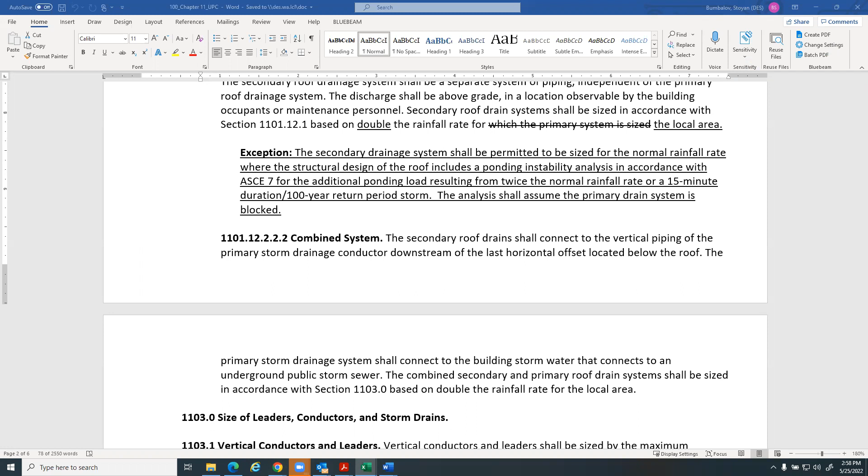Thank you. Steve, you still have your hand up. Did anybody have any more discussion? Sorry. It's okay. Was there any more discussion on this proposal? If not, I'm ready for a motion. Corey, Bill Masaki here. I move for approval. I'll give it a second. Thank you. I have a motion and a second to approve this proposal. All those in favor say aye. Aye. Aye. Aye. Any opposed?

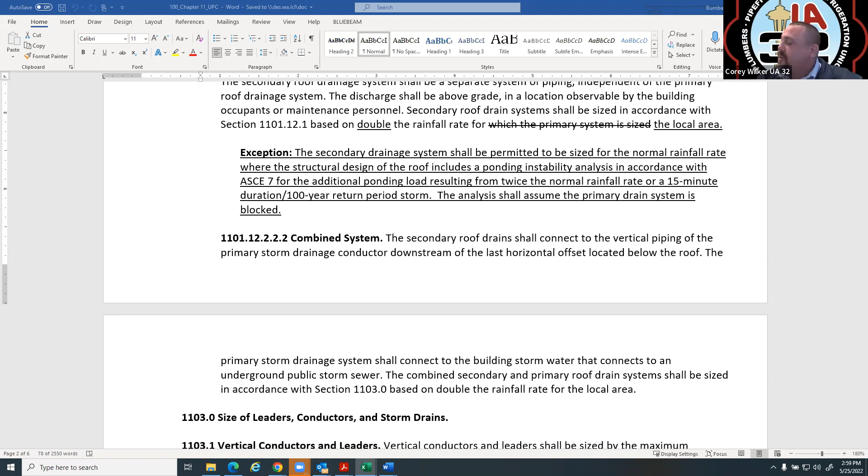Aye. Was that a late aye or a nay? I think it was a late aye. Let's try that again. All those in favor say aye. Aye. Aye. Aye. Any opposed? Thank you. We are going to move that proposal for UPC Chapter 11 secondary drain sizing forward to the BFP committee. Thank you, John. Thanks, John.

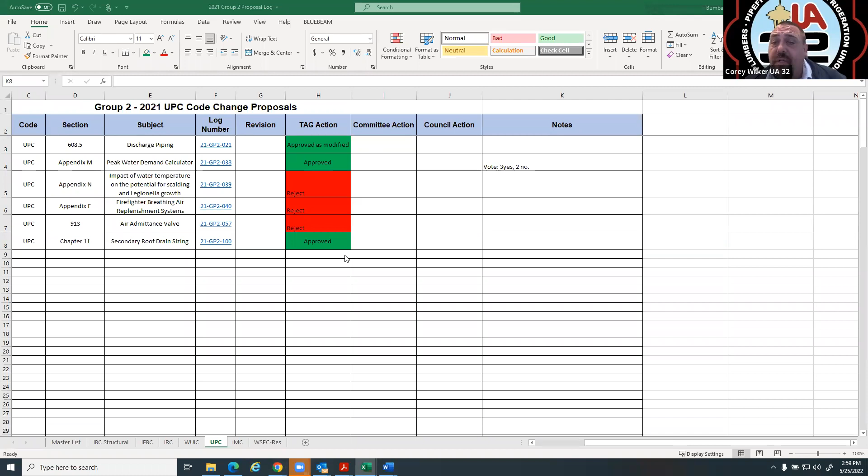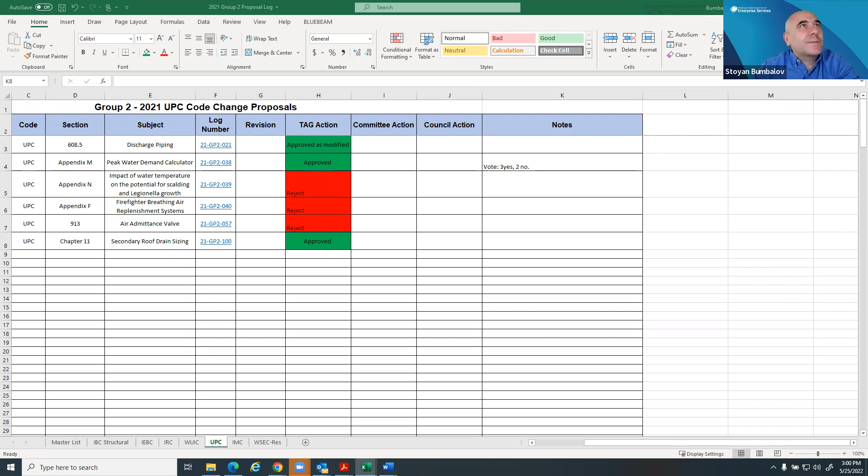The next item on our agenda is, I'm sorry, Stoyan, did you need to say something? Yes, this is what your work today looks like. Green is what was approved, and red is what was rejected. That looks accurate to my information. Okay. We have approved each one to move to the BFP, so I think we're good to move forward, or do we need a motion in general to move everything forward? No. Okay. Item number 5 is other business. Does anybody have any other business?